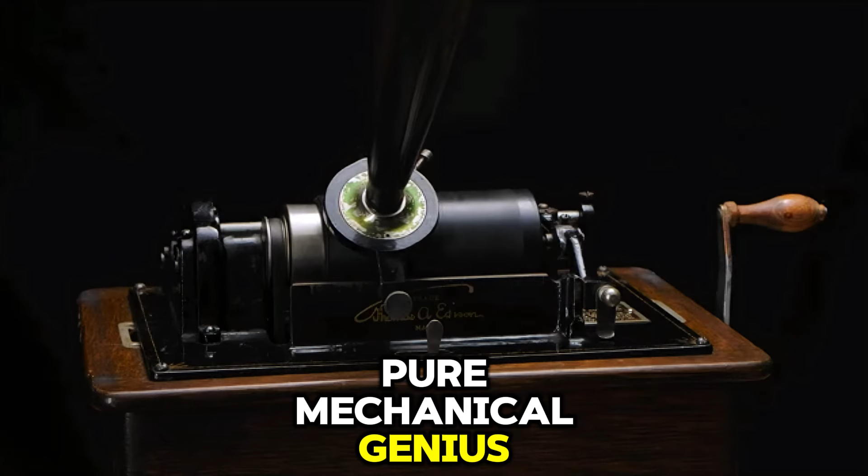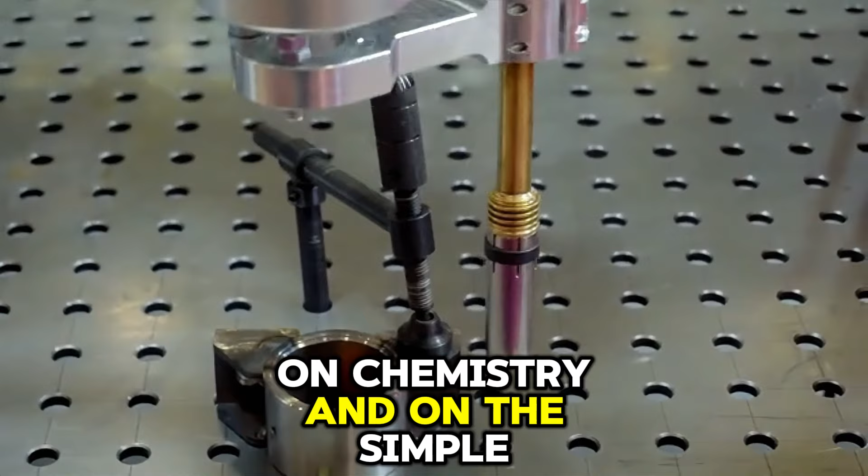While we rightly remember the thunder of tanks and the roar of fighter planes, many of the most critical battlefield tools were forgotten marvels of engineering. These were gadgets and systems that needed no plug, no battery, and no fragile electronics. They ran on springs, on pressure, on chemistry, and on the simple, elegant laws of physics. They were the unsung heroes of a world at war, proving that real power doesn't always come from a socket. Today, we're uncovering 12 forgotten technologies that prove you don't need a plug to be powerful.

Number 1, before radar, listening to the skies. Along the British coastlines, before radar existed, before electronic systems transformed warfare, something remarkable emerged. They built acoustic mirrors, large concrete structures, sometimes 45 meters in diameter, designed to listen to the sky. Parabolic reflectors focused sound waves from aircraft engines onto microphones placed at their focal point. No electricity, no active components, just the physics of sound reflection. The same principle you encounter in a museum's whispering gallery.

Locals still call the ones at Dungeness in Kent and Hythe the listening ears. Microphones placed at the focus of these mirrors could detect aircraft sound at distances far greater than what any observer could see from the English Channel, and operators would listen through earpieces or stethoscopes as sound waves concentrated naturally through the mirror's geometry. Here's where it gets complicated.

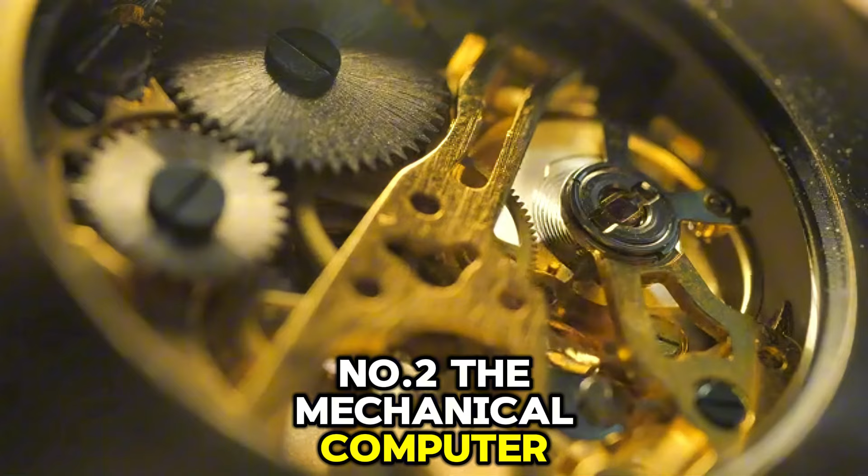Number 2, the mechanical computer that aimed artillery. Now something genuinely changed naval warfare. The Mark I fire control computer, developed by Hannibal C. Ford and William Newell. Weighing over 3,000 pounds, it sat deep inside warship hulls in a watertight compartment called the plotting room, and it was an electromechanical analog computer where the calculating mechanism itself was purely mechanical.

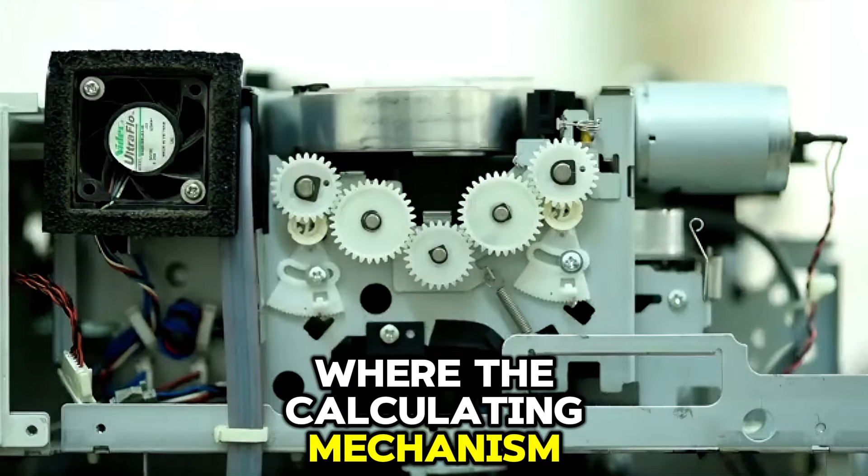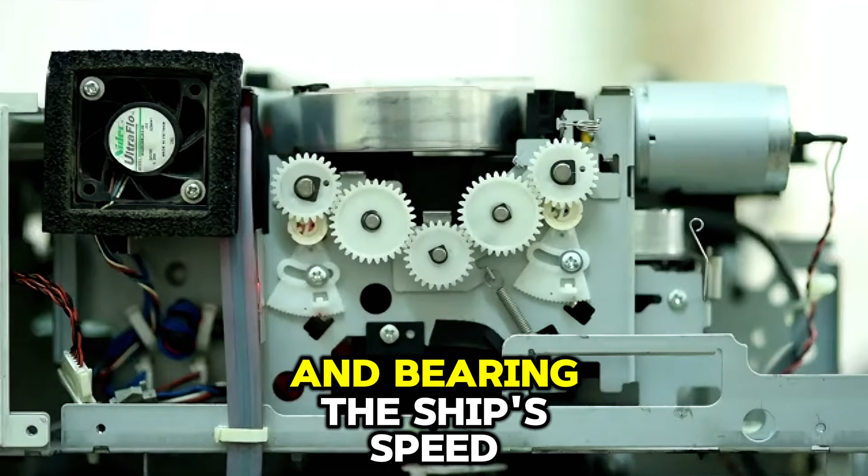A team of sailors stood around this 4-foot-tall machine, feeding it information: the target's range and bearing, the ship's speed through water, wind speed and direction, even the average muzzle velocity of the guns, based on propellant temperature and the number of rounds already fired that day. The Mark I then performed continuous mathematical calculations using 4 component integrators, devices that worked like ball-type computer mice rotating a ball to solve geometric equations.

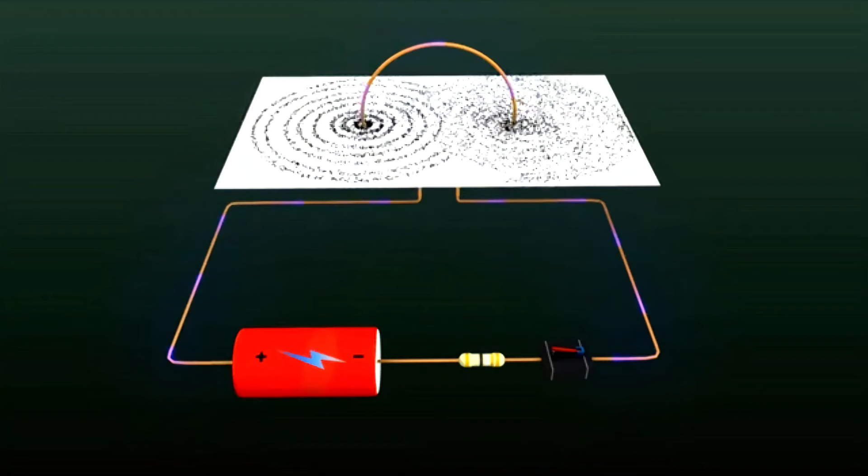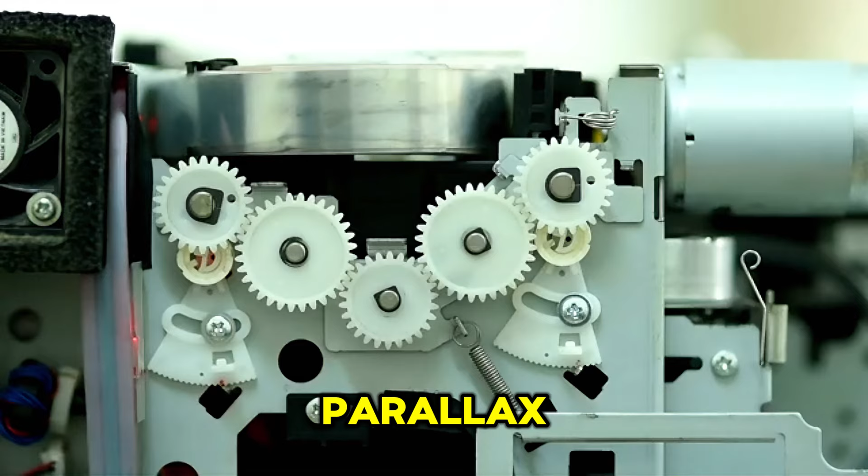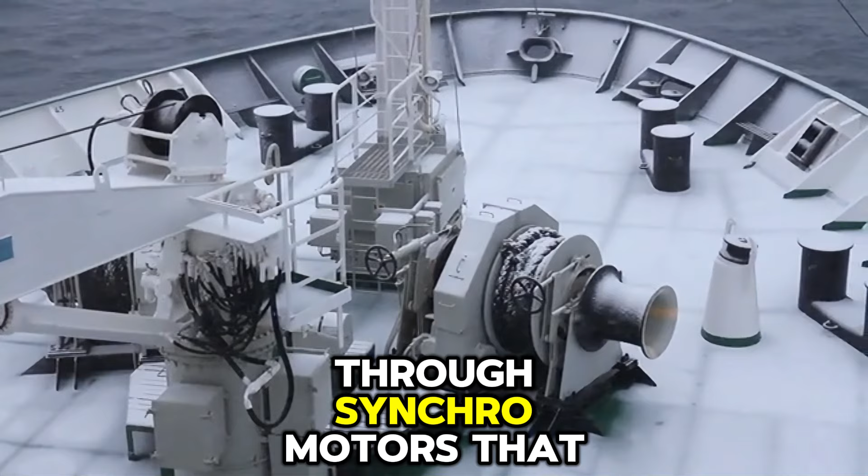The computer automatically calculated lead angles to the future target position, adding corrections for gravity, relative wind, the spinning motion of the projectile, and something called parallax, because the guns were displaced along the ship's length. All of this happened mechanically through gears and rotating discs and cam mechanisms that physically performed the mathematics. Output went to the gun mounts through synchro motors that actuated hydraulic servos to aim the guns with remarkable precision.

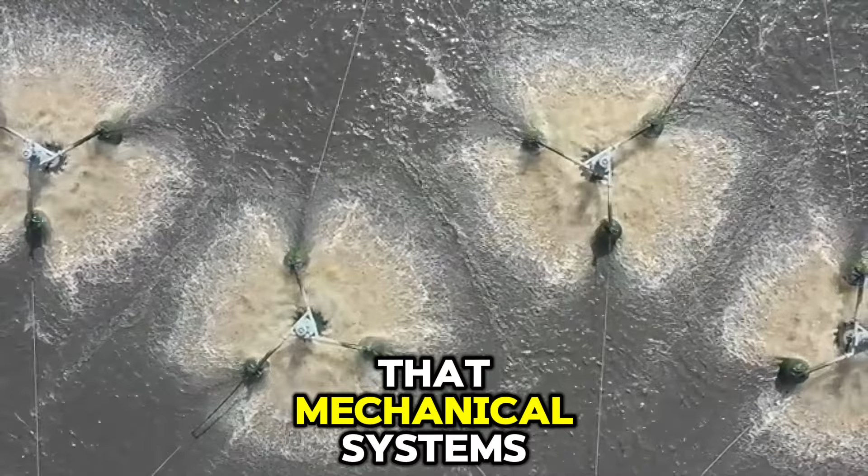Ship-to-ship and ship-to-shore gunfire accuracy improved significantly, but the Mark I proved most valuable in anti-aircraft warfare until jet aircraft arrived and pushed speeds so high that mechanical systems couldn't react fast enough.

Think about this for a moment. A 3,000-pound mechanical computer requiring no central processing unit, no digital logic, no transistors. It calculated firing solutions faster than humans could calculate them manually, and it kept doing it reliably for decades. Battleships equipped with the Mark I had up to 4 of these computers working simultaneously. Destroyers had one, and this system remained in service until 1991.

Number 3, the most expensive bomb sight in history. Carl Norden was a Dutch-Swiss engineer who immigrated to America in 1904 and started working on bomb sights in the 1920s, and the project nearly broke him. His early prototypes failed catastrophically. From only 3,000 feet altitude, his 1924 design showed a circular error probable of 110 feet, meaning half his bombs landed within that distance of the target, and that was worse than existing systems.

Bombardiers hated it because it was too complicated to use. Obsession drove Norden forward.

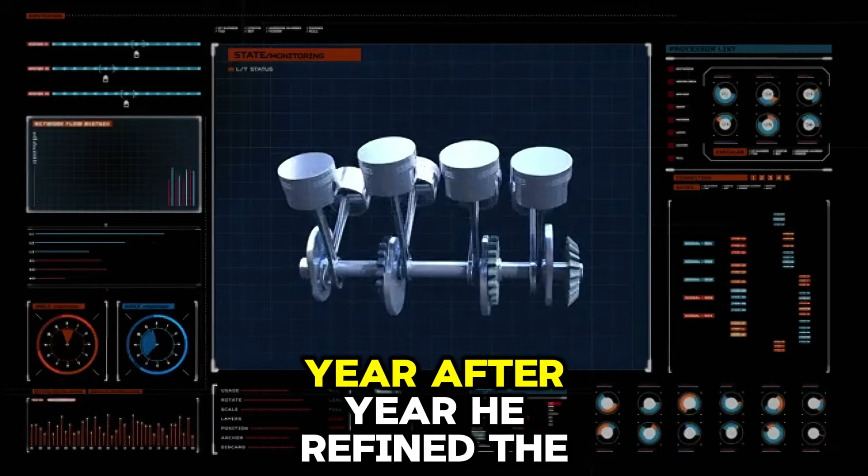Year after year, he refined the design, and by 1928 he'd improved the accuracy to 2% of altitude. By 1931, when the Mark 15 version arrived for testing, the accuracy had improved dramatically. From 4,000 feet altitude, it achieved an 11-meter circular error probable, and even at higher altitudes, it delivered 23 meters.

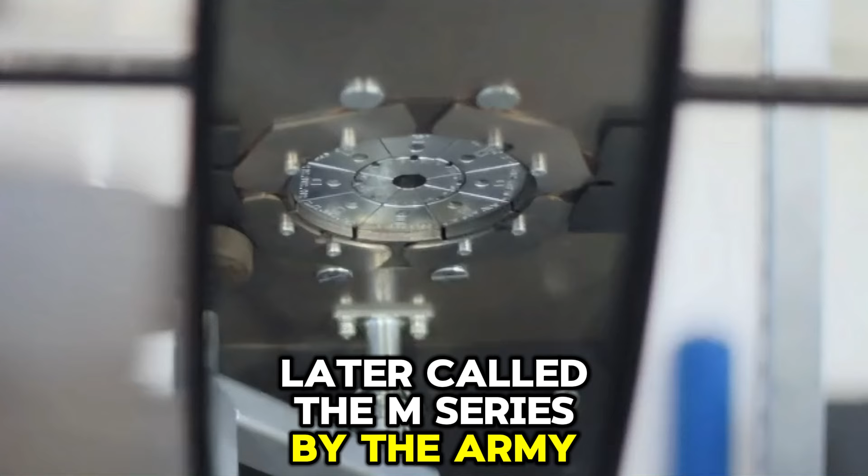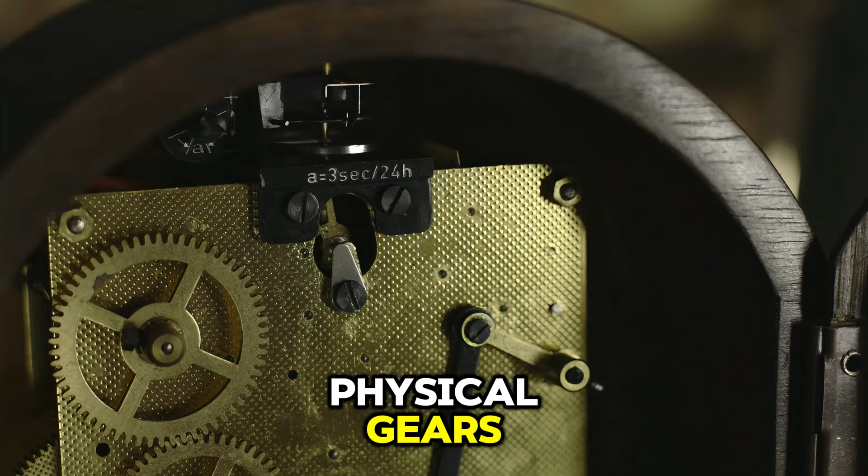The Mark 15, later called the M series by the Army Air Force, combined a mechanical analog computer with optical sighting equipment and a gyroscopic stabilization platform. The bombardier would locate the target in the sighting telescope, then make fine adjustments using 2 control wheels throughout the bomb run. Inside the bomb sight, a wheel and disc calculator continuously recalculated the bomb's impact point based on changing flight conditions. All mechanical, all based on physical gears, cams, and rotating discs, performing mathematics.

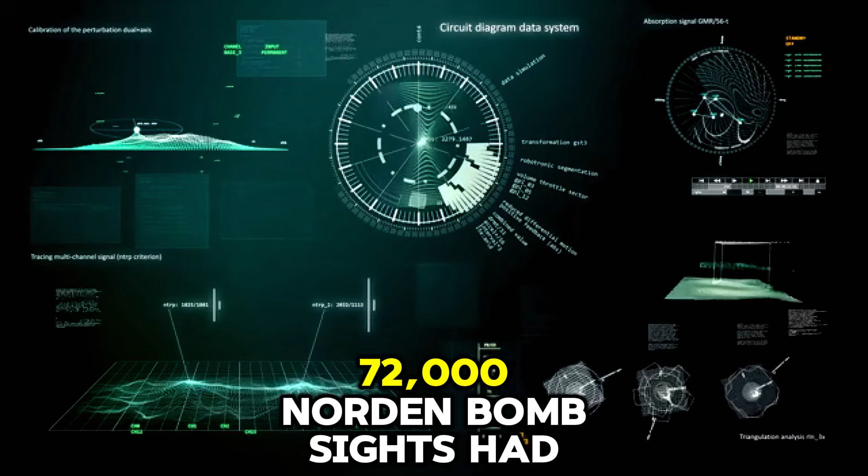What nobody expected was the cost. The total development and production budget reached $1.1 billion. That's 2/3 of the Manhattan Project's budget. By war's end, 72,000 Norden bomb sights had been produced at $8,800 each.

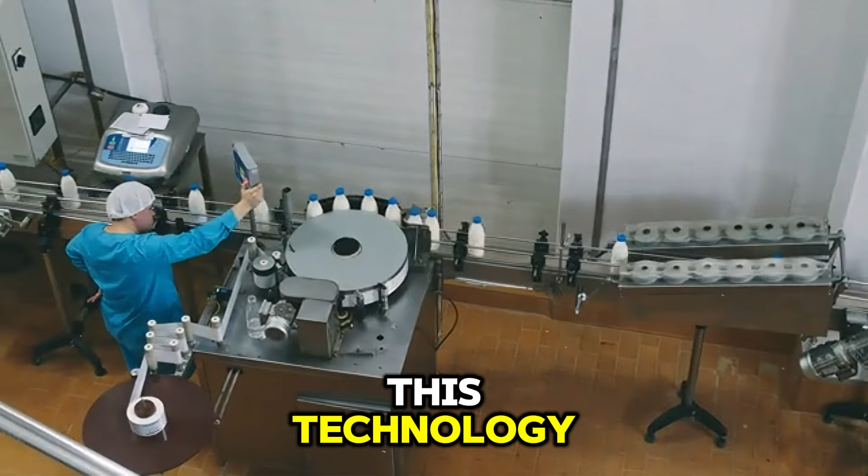And here's the irony that makes this technology so interesting: in actual combat, the Norden did not achieve its expected precision. The average circular error probable in 1943 was 1,200 feet, significantly worse than pre-war testing suggested. The difference between laboratory conditions and actual combat, between stable platforms and turbulent air, between theory and reality, turned out to be enormous.

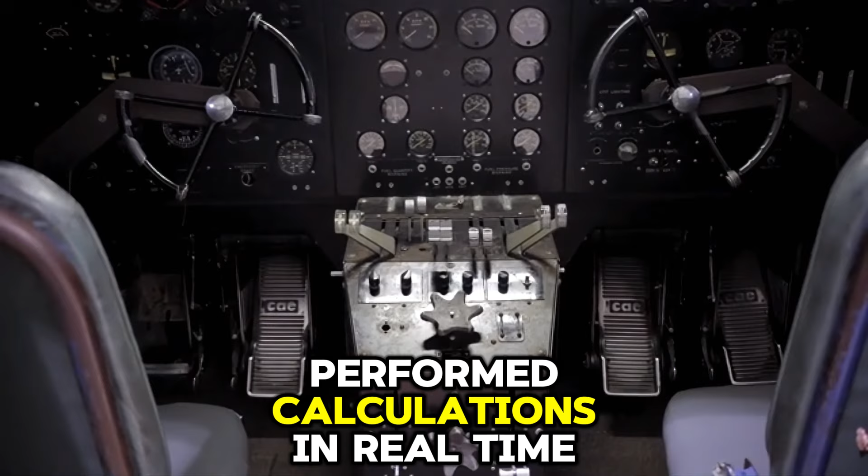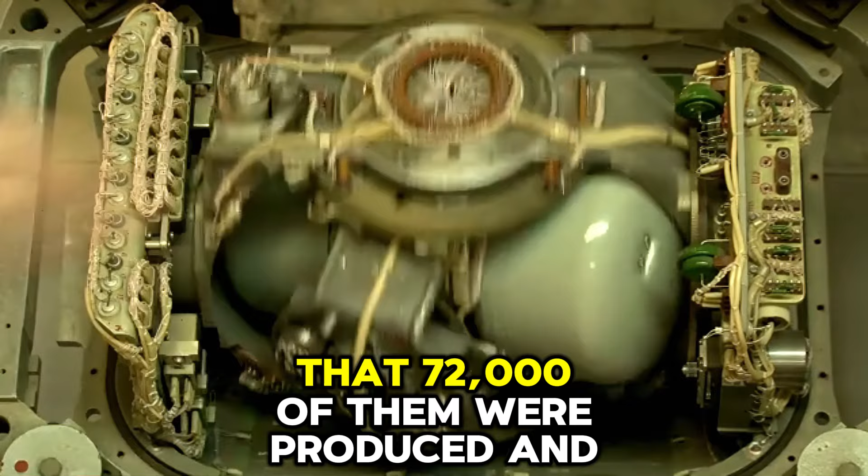But the reputation endured, and that matters, because the mechanical computer inside that bomb sight performed calculations in real time, continuously, without any electronic components. It did this so effectively that 72,000 of them were produced and deployed. That's the scale of mechanical engineering achievement.

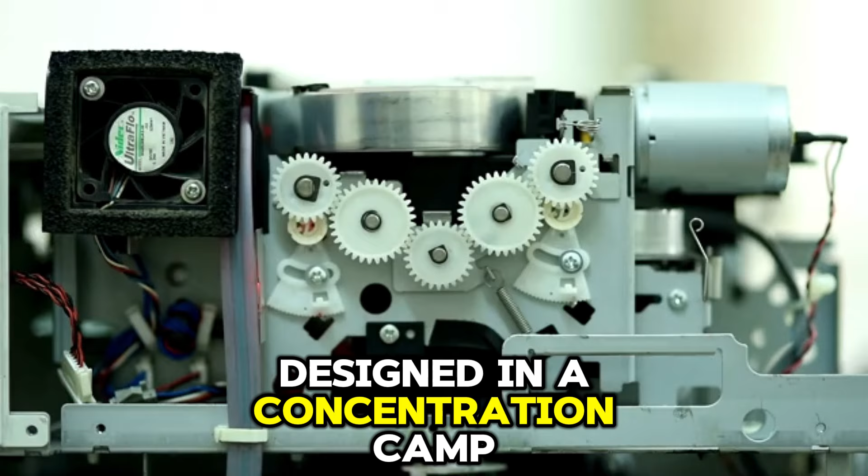Number 4, the hand-cranked calculator designed in a concentration camp. Curt Herzstark was an Austrian engineer who managed his family's precision instruments company in Vienna, and when Nazi Germany annexed Austria, he fell under the Nuremberg laws, classified as a Mischling, or mixed blood person, because he had a Jewish father and an Austrian mother - a precarious legal status, a dangerous existence.

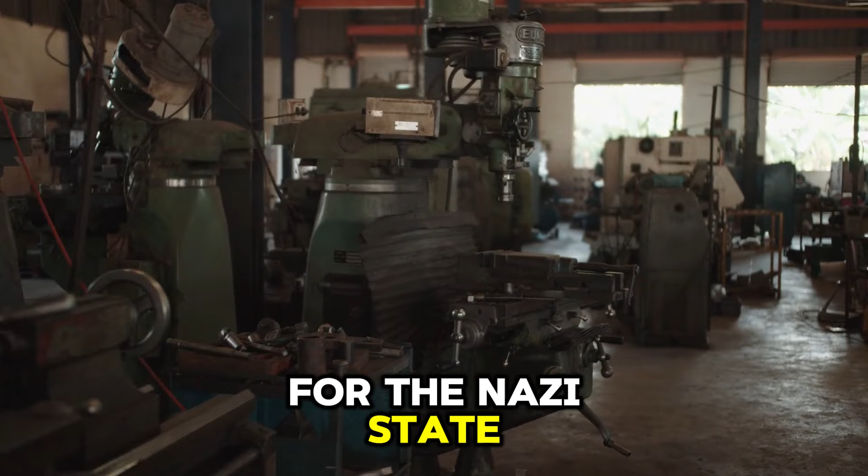The Nazis imprisoned him and sent him to Buchenwald concentration camp. While imprisoned, he was assigned to war equipment production for the Nazi state, and during that imprisonment, in that camp, he refined a hand-cranked mechanical calculator he had begun designing before the war.

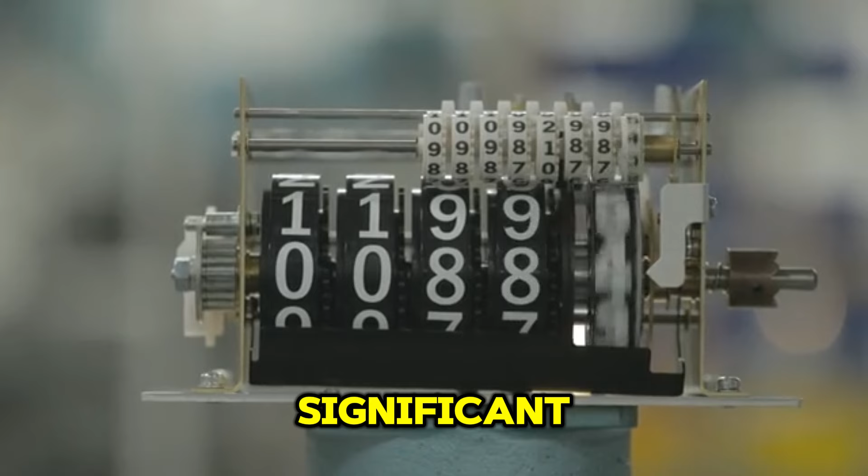The Curta was a cylinder about 4 inches tall, entirely mechanical, containing no electrical components whatsoever. You cranked it, used mechanical digit wheels and sliders to input numbers, and it performed addition, subtraction, multiplication, and division through pure mechanical motion. The innovation was significant because it used a modified stepped drum mechanism, a mechanical system elegant in its simplicity and effectiveness.

Curt Herzstark survived the camp. After the war, the Curta entered production, and for 2 decades it remained the best portable calculator available until electronic calculators displaced it in the 1970s.

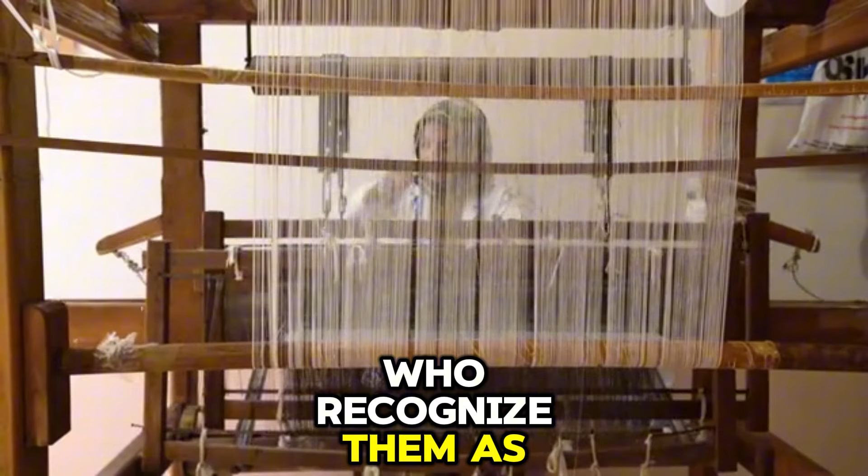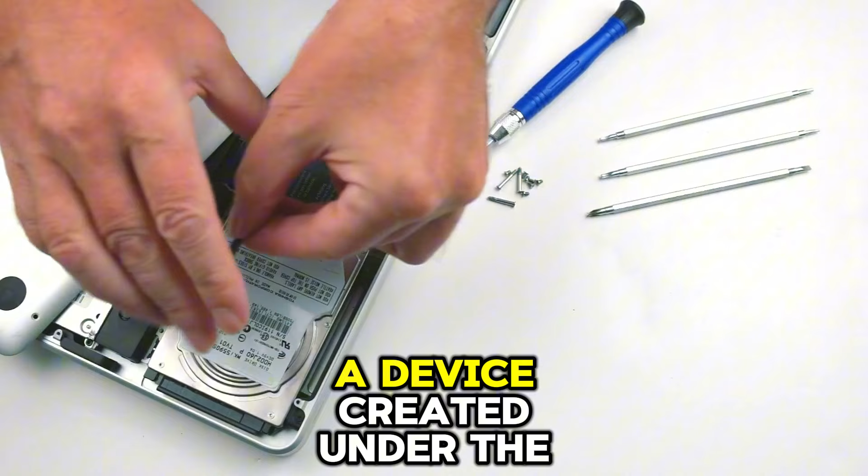Here's what's remarkable: thousands of original Curtas remain in working order today, and they're highly sought by collectors who recognize them as performing calculations just as smoothly now as they did 70 years ago. The story of the Curta is the story of human ingenuity persisting even in circumstances of extreme duress - a mechanical calculator designed in a concentration camp, a device created under the worst imaginable conditions that outlasted most of the electrical technologies developed in comfort.

Number 5, submarine periscopes: simple optics, profound impact. When you think of submarine periscopes, you probably imagine them as high-tech instruments, but they're not. Submarine periscopes are optical engineering achievements built from centuries-old principles and requiring no electricity whatsoever.

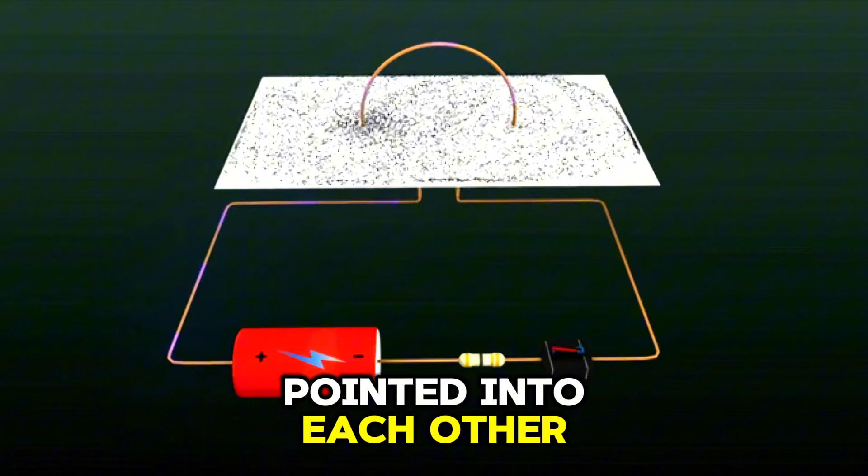Fundamentally, a periscope is 2 telescopes pointed into each other. Light enters the objective lens at the top, travels down a tube, gets reflected 90 degrees by a prism, travels horizontally, gets reflected another 90 degrees by a second prism, and finally reaches the eyepiece, where the observer looks.

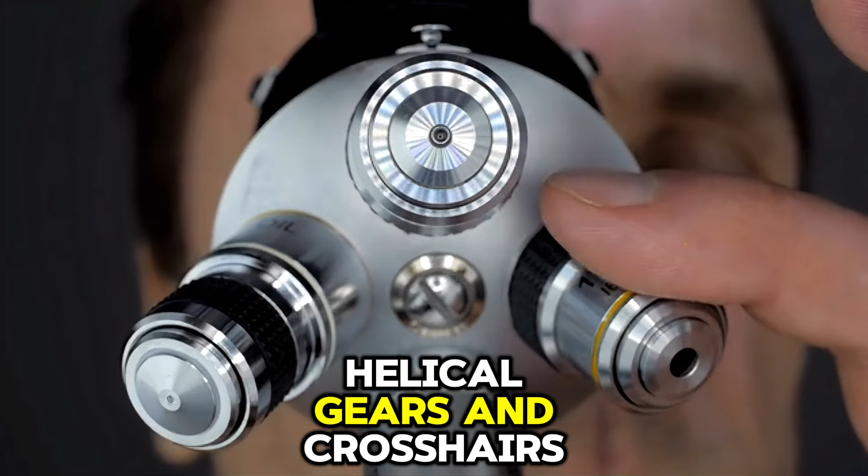Magnification depends on the relationship between the objective and eyepiece telescopes. Focus adjusts manually through helical gears, and crosshairs provide mechanical aiming marks. That's it, that's the entire technology: lenses, mirrors, prisms, and mechanical gears with no electricity required.

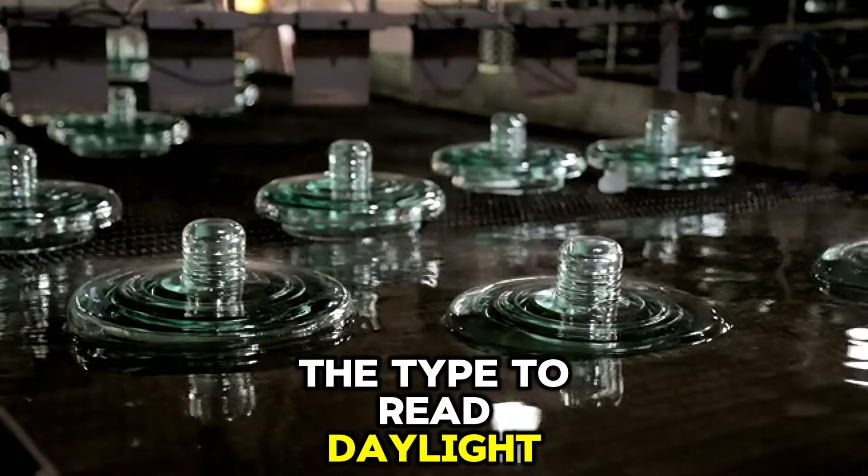The Type 2 daylight attack periscope was introduced into American submarine fleets in 1942 and found widespread use and acceptance throughout the remainder of World War II and for decades afterward. Search periscopes and night periscopes had larger heads to gather more light in reduced visibility conditions, while attack periscopes were slimmer, about 1¼ inches in diameter, to minimize visibility.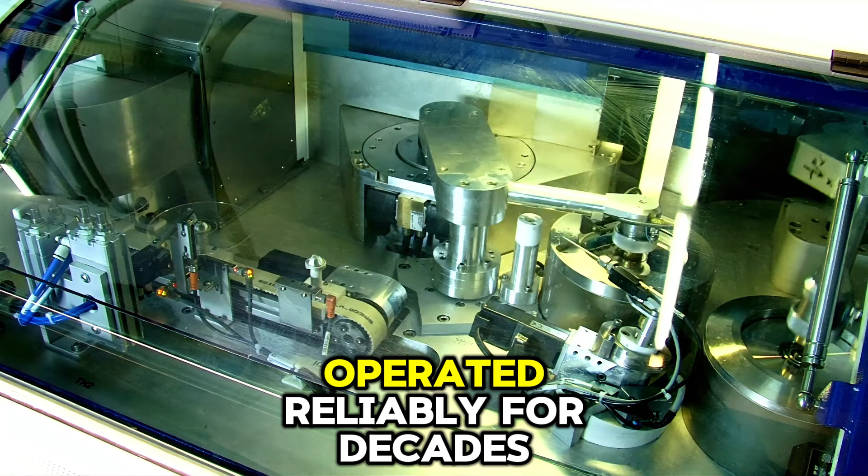The elegance of the mechanical periscope lies in its simplicity, because it required no active power, could be manufactured with pre-war precision machinery, operated reliably for decades, and gave submarine crews the ability to observe surface targets while maintaining submerged protection. That's a profound operational advantage derived from basic optics and mechanical precision.

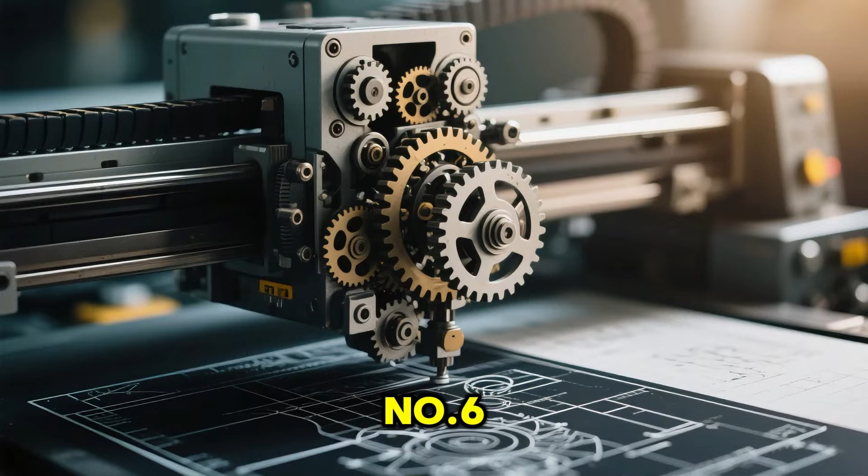Number 6, firing solutions at sea: mechanical plotting.

On warships, officers needed to calculate firing solutions for their guns, which required precise positioning of the target, understanding the ship's motion, calculating range and bearing, and predicting the target's future position.

These calculations happened on mechanical plotting tables, rotating brass arms with protractors, transparent perspex rulers, and geared mechanisms for precise rotation. Sailors would plot the target's position by marking bearing lines from observation posts, then rotating mechanical arms to their correct bearings. Where these mechanical arms intersected, that's where the target actually was, and the entire calculation got performed through mechanical geometry, through the physical arrangement of arms and the intersection of lines.

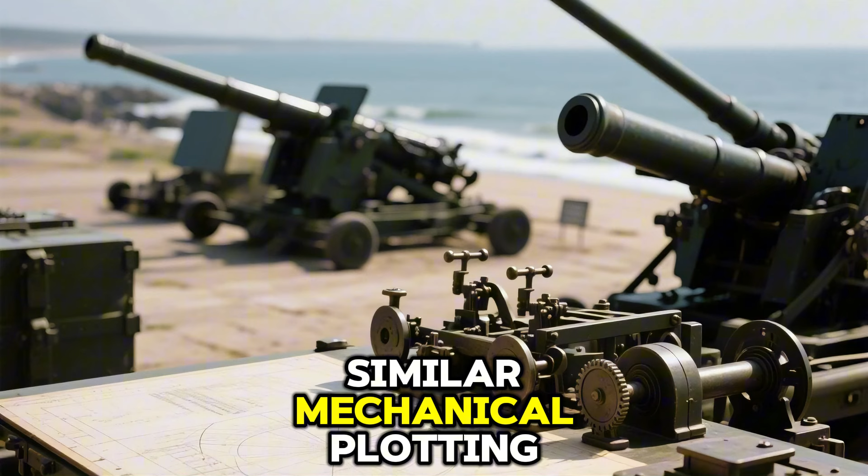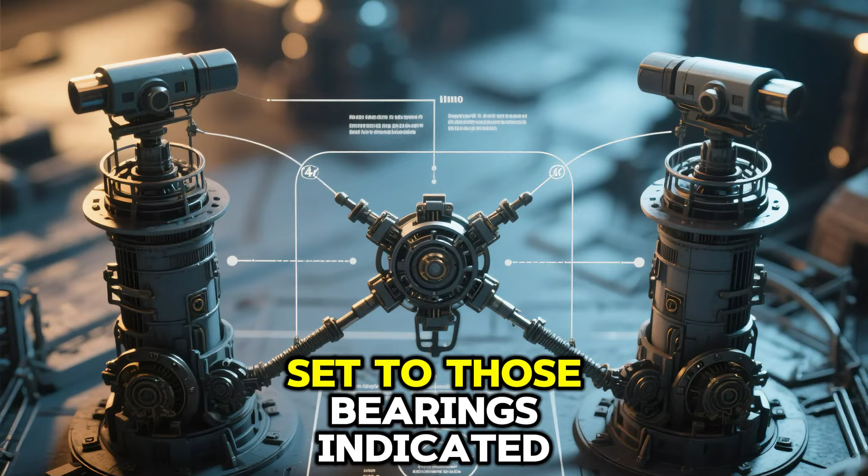For coastal artillery batteries, similar mechanical plotting systems determined firing solutions. Two fortress observation posts would transmit bearing information to a central mechanical device, and the intersection of mechanical arms set to those bearings indicated the target's location with remarkable precision. All of this got done mechanically, with no electrical components involved.

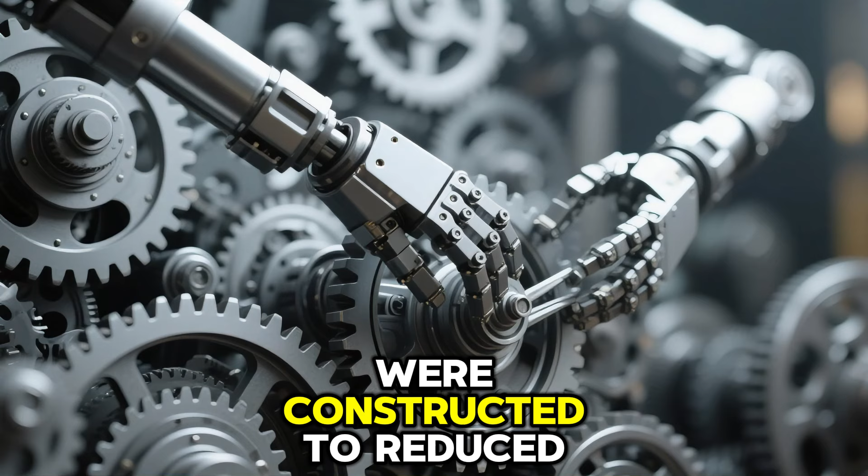These plotting instruments were constructed to reduced scale, a mechanical model of the actual geography with arms that could be positioned according to received bearing information. Through mechanical geometry, pure physical mathematics, the system calculated firing solutions. This technology is almost entirely forgotten today, but the principle remains sound because mechanical systems can solve complex mathematical problems through the precise arrangement of physical components.

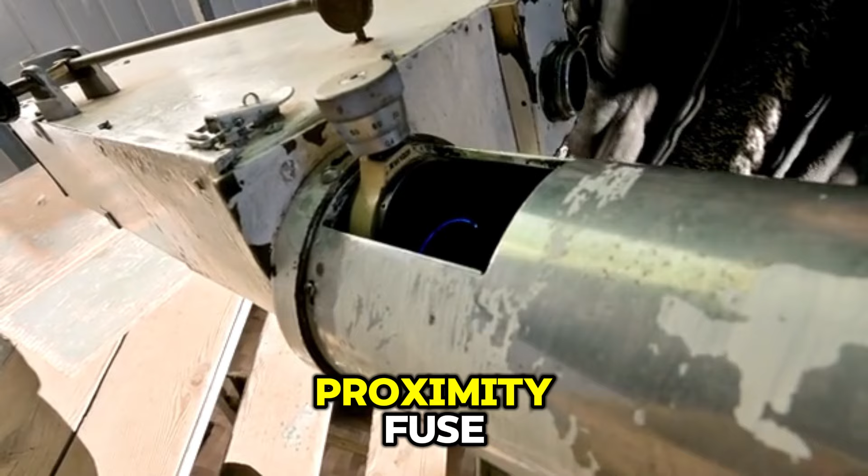Number 7: the detonator that changed everything. The proximity fuse. Before proximity fuses, artillery shells and bombs had only three detonation methods: direct contact, a timer set at launch, or an altimeter, and all of these had severe limitations.

A shell that barely missed its target would not explode. A timer fuse required accurate prediction by the gunner and precise timing by the fuse mechanism, and if either was wrong, the shell exploded harmlessly before or after passing the target. At the start of the Blitz in London, estimates suggested it took somewhere between 20,000 and 100,000 artillery rounds to shoot down a single aircraft. And that's how difficult the targeting problem actually was.

Proximity fuses changed everything by detonating when the shell approached within a certain distance of its target, eliminating the need for direct hits or perfect timing.

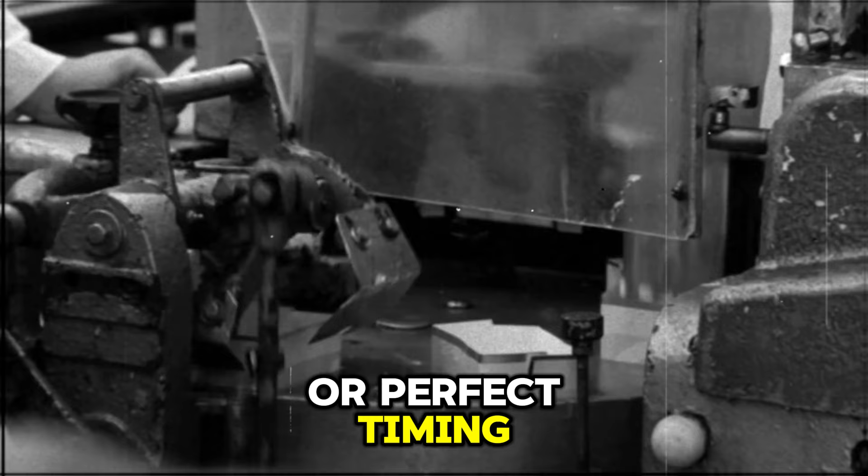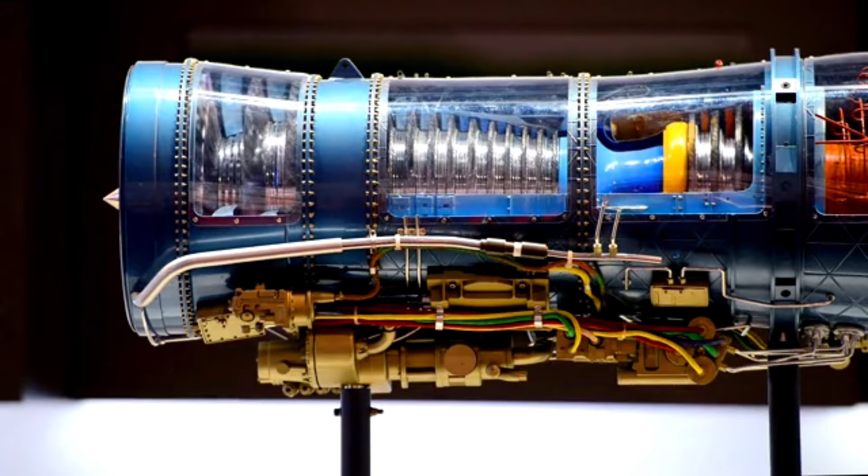The concept originated in Britain with Samuel Curran, William Butement, Edward Shire, and Amherst Thomson at the Telecommunications Research Establishment, proposing to use small-range Doppler radar within a fuse.

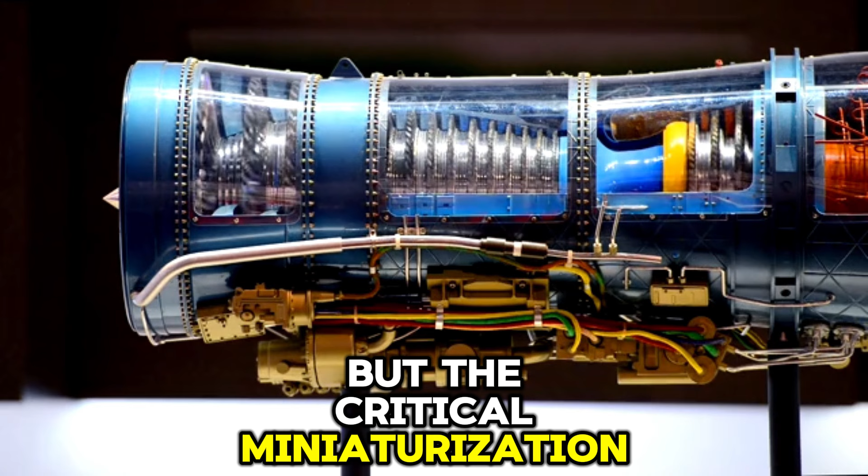But the critical miniaturization work, creating a fuse that could survive the extreme acceleration of being fired from a cannon and the immense centrifugal force of a spinning artillery shell, that work happened in America. Physicist Merle Tuve and his Section T team at Johns Hopkins Applied Physics Laboratory solved the engineering challenge.

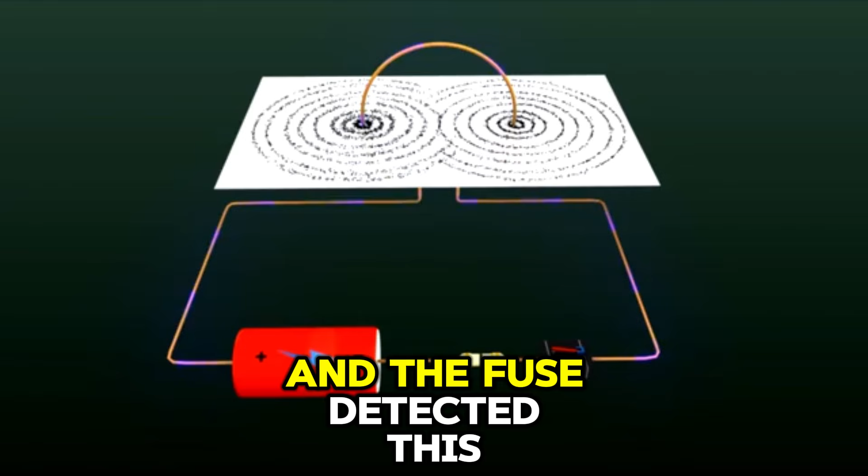The fuse contained 4 or 5 electron tubes, where one tube acted as a transmitter connected to the shell's antenna, continuously emitting radio waves around 180 to 220 megahertz. As the shell approached a target, the transmitted signal reflected back, and the fuse detected this reflected signal. The movement of the shell and target created a Doppler frequency shift, a change in frequency due to relative motion, and this frequency shift was the signal that triggered detonation.

To survive the extreme stresses of artillery launch, engineers packed components in wax and oil for stress equalization, replaced conventional electrodes with planar electrodes, and modified miniature hearing aid tubes to withstand up to 20,000 Gs of acceleration and centrifugal forces from shells spinning at 30,000 RPM.

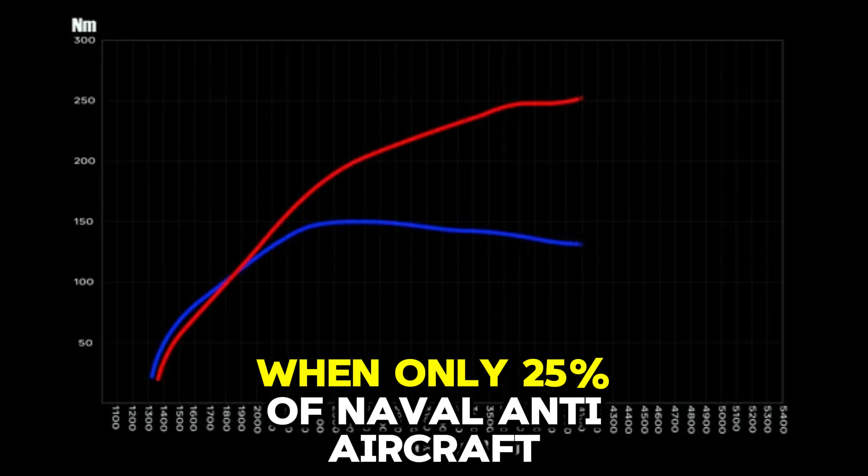The effectiveness was dramatic. In 1942, a test aboard the USS Cleveland destroyed 3 drone aircraft with just 4 projectiles. And by 1943, when only 25% of naval anti-aircraft ammunition used proximity fuses, those fuses accounted for 51% of the aircraft kills. Production scaled enormously over the war years.

Over 22 million proximity fuses were manufactured, and the cost dropped from $732 per fuse in 1942 to $18 in 1945, a 98% reduction through manufacturing efficiency. Over 100 American companies got mobilized for production, and by 1944, a large proportion of America's entire electronics industry was dedicated to making proximity fuses.

In the Battle of the Bulge, 200,000 shells with proximity fuses, codenamed POSIT, were deployed in December 1944, and General Dwight D. Eisenhower had personally demanded access to these fuses after initially being denied them.

General George S. Patton credited proximity fuses with saving Liege and stated that their use required a complete revision of land warfare tactics. German divisions, confident they were safe from timed artillery fire because bad weather would prevent accurate observation, got caught in the open by proximity-fused shells exploding just above the ground.

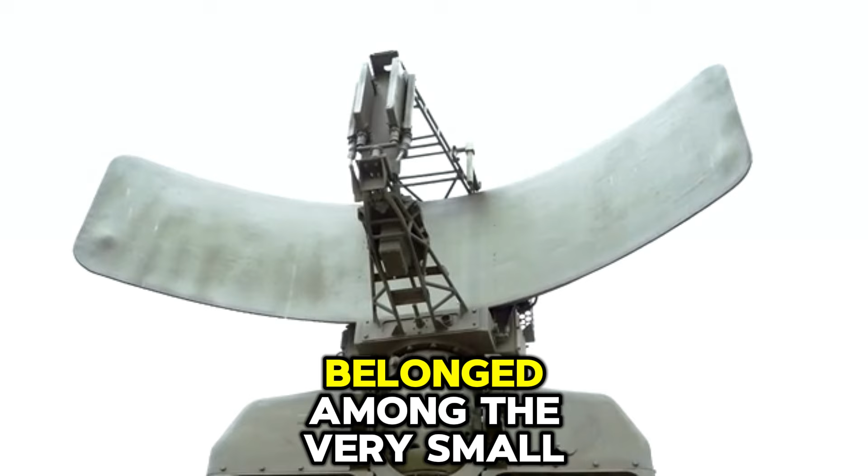Admiral Lewis Strauss summarized it this way: "One of the most original and effective military developments in World War II was the proximity fuse, and while no invention alone won the war, the proximity fuse belonged among the very small group of developments, such as radar, upon which victory very largely depended." The government classified it at levels comparable to the atomic bomb because security was so tight that Soviet spy Julius Rosenberg managed to steal a working model only by finding a non-anti-aircraft variant, while the most valuable type remained secure.

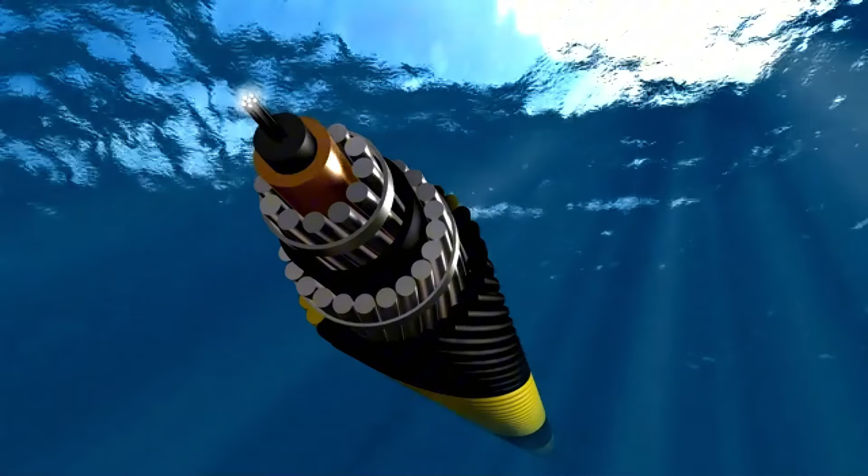Number 8: The torpedo that guided itself. Torpedo guidance systems represent one of the oldest mechanical technologies, refined to remarkable precision by World War II.

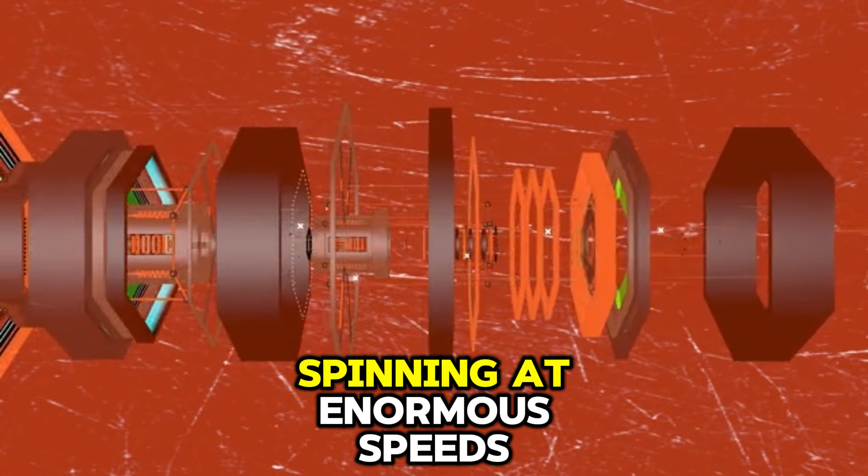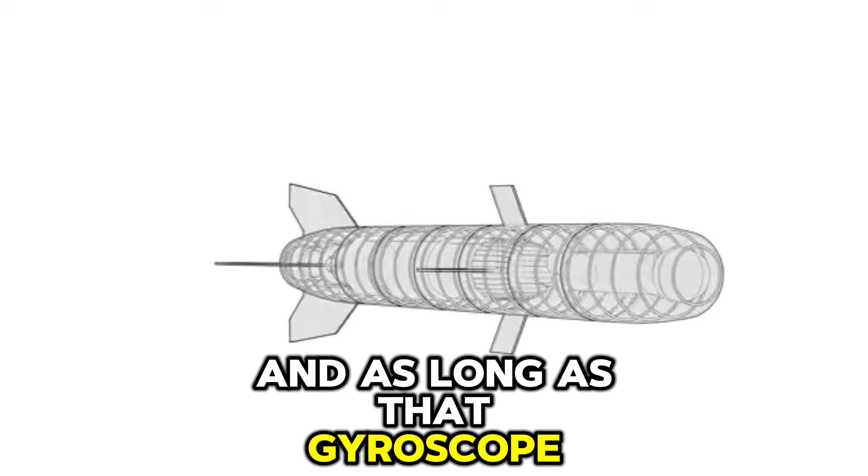Every torpedo guidance system relied on a gyroscope spinning at enormous speeds, often 15,000 to 20,000 RPM. This spinning mass possessed a remarkable physical property: resistance to changes in its rotational axis. A gyroscope wants to keep spinning in the same direction. This property got exploited brilliantly because the torpedo's gyroscope was aligned along the torpedo's body axis, and as long as it maintained its spin and orientation, it provided a mechanical reference point.

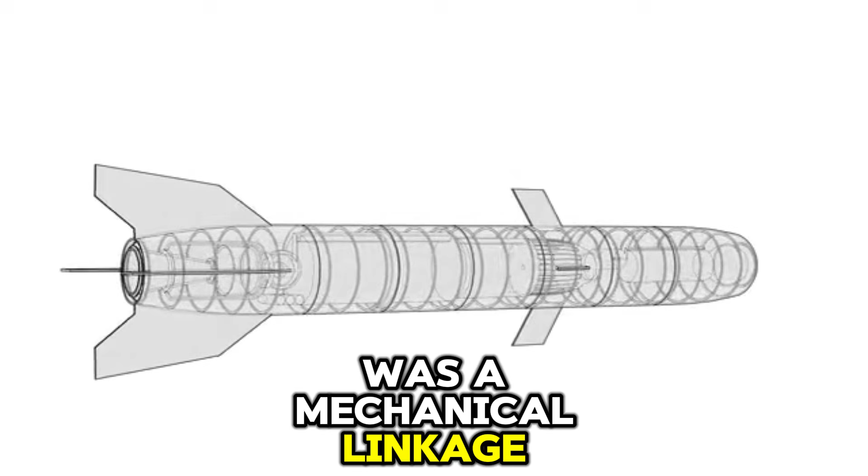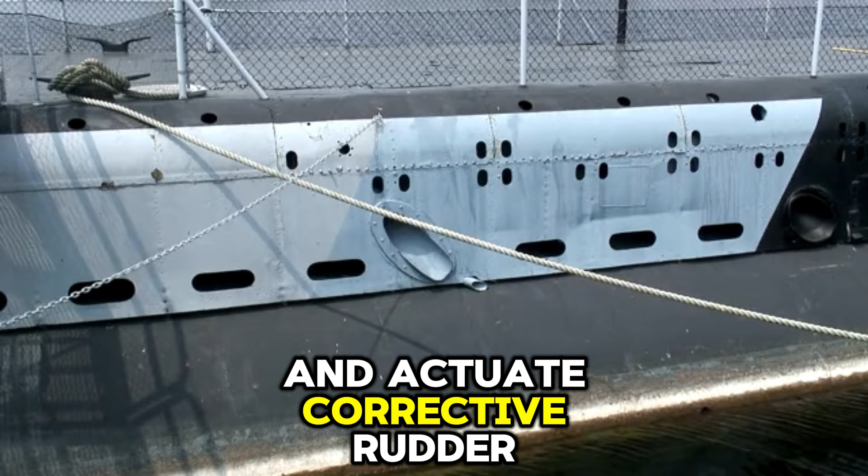Connected to this gyroscope was a mechanical linkage system, and if the torpedo began to deviate from its set course, this linkage would detect the deviation and actuate corrective rudder movements, all mechanically, without any electronic components.

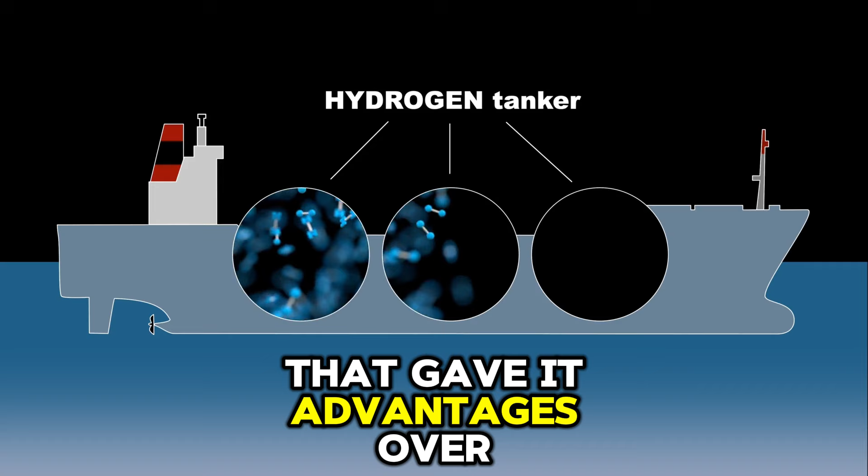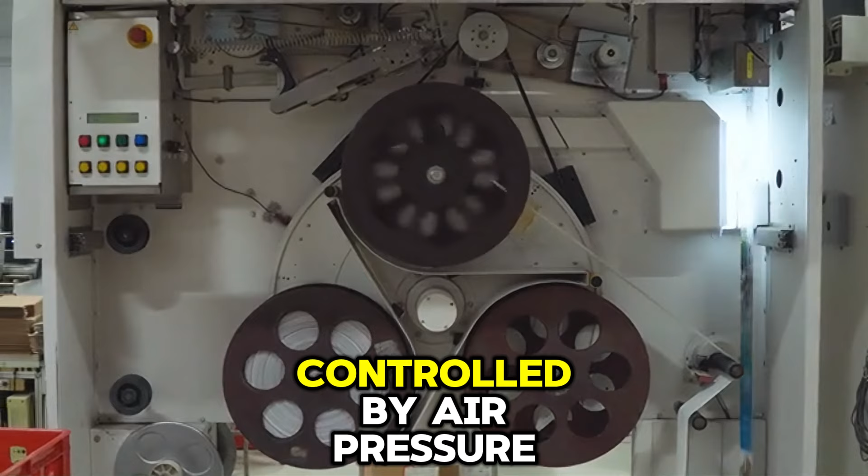The Japanese Type 93 Long Lance torpedo, considered by many to be the best torpedo of World War II, used oxygen and kerosene propulsion, a mechanical gyroscope for stability, and carried a large warhead that gave it advantages over contemporary alternatives. American submarine torpedoes used pressure-driven air systems to power the gyroscope spin-up mechanism, and mechanical spring mechanisms controlled by air pressure would unlock the gimbal structures, the rotating mounts, allowing angular correction.

Some torpedoes could be set to run in directions different from the tube axis, allowing what got called gyro-angled torpedoes, and the mechanical angle-setting capability could offset the initial course by up to 90 degrees. Separate mechanical mechanisms maintained the torpedo at a constant depth, keeping it from passing beneath the target ship.

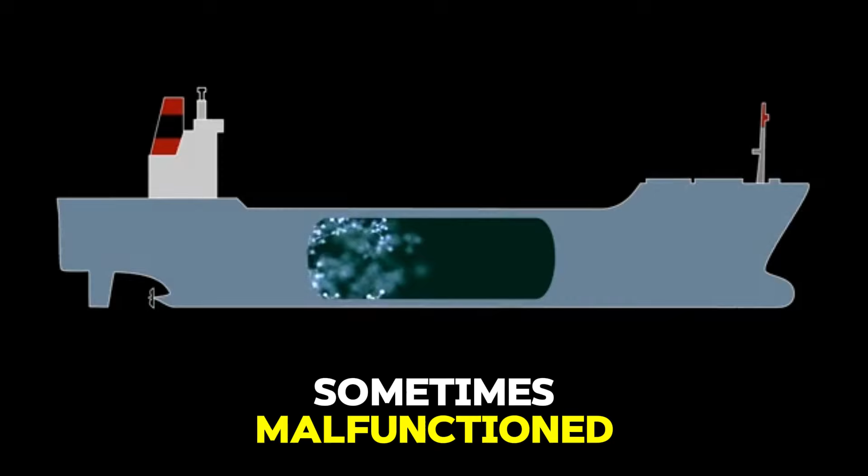The American Navy encountered significant problems with torpedo performance, not because the gyroscopic guidance failed, but because the depth-keeping mechanisms sometimes malfunctioned, causing torpedoes to run deeper than set and pass underneath their targets. Eventually corrected, these were design failures rather than fundamental flaws in mechanical gyroscopic guidance. The principle remains elegant because a spinning mechanical device, resistant to directional change, provides reference and control through pure physics—no electricity, no active components, just gyroscopic inertia and mechanical linkages.

Number 9: Cipher machines that typed secrets. During World War II, the U.S. Army used a portable mechanical cipher machine called the M209 for encoding and decoding secret military messages in the field.

The M209 operated on rotor principles, using a series of rotating mechanical disks to substitute letters in a predictable but changeable pattern, and it was compact enough to carry in the field. It required no electricity and was entirely hand-operated, with a crank mechanism and rotor adjustments performed manually.

The distinction matters because while the Enigma machine, famous for its role in German communications, appeared similarly mechanical, it actually required electrical power for operation, whereas the M209 was truly mechanical—its rotor substitution cipher performed entirely through manual operation and mechanical rotation.

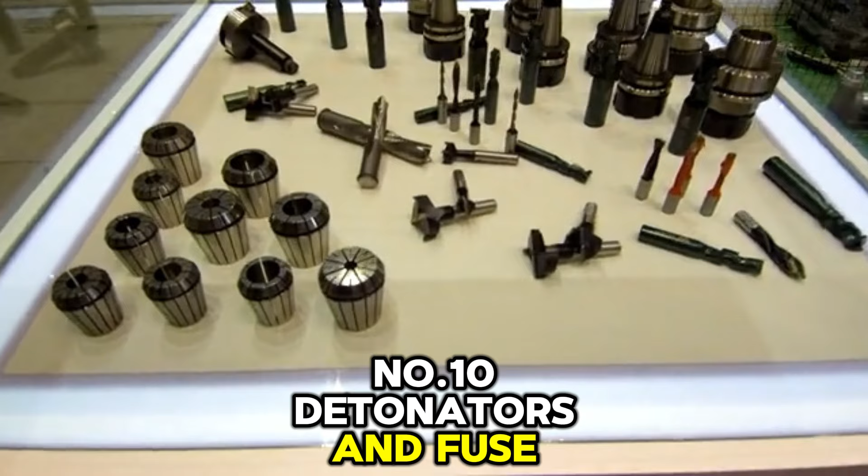Number 10: Detonators and fuses, the mechanics of explosion. Before proximity fuses revolutionized detonation, armies relied on mechanical fuses that operated through remarkably simple principles.

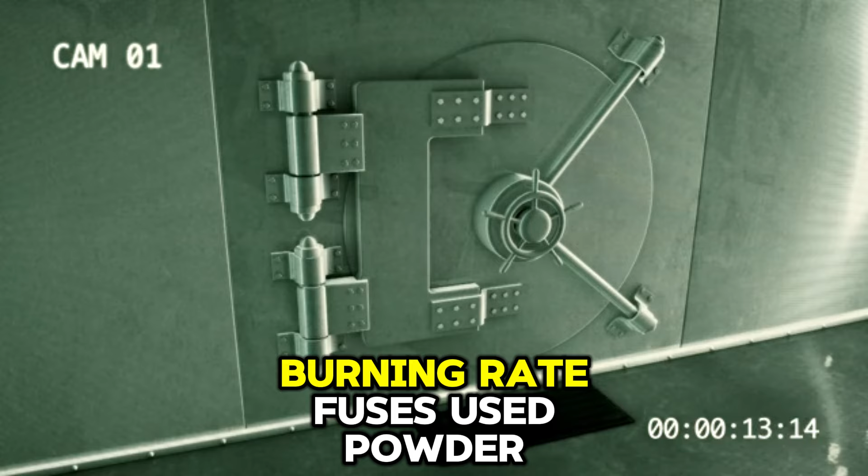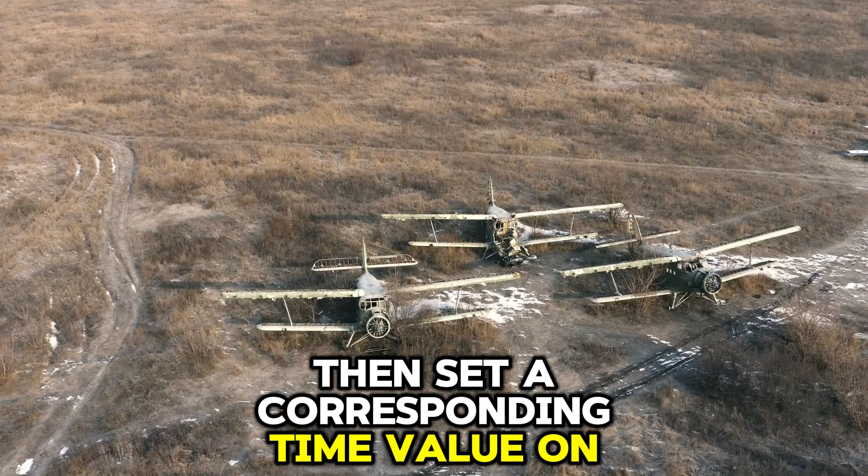Burning rate fuses used powder trains that burned at calculated rates to achieve predetermined detonation times, and artillery gunners would calculate the expected time of flight for their shell based on distance and firing angle, then set a corresponding time value on the fuse. The powder train, burning at a known rate, would reach the detonator at approximately the correct moment. The problem was that burning rates varied—manufacturing tolerance created unpredictability, and battlefield conditions like temperature, humidity, and altitude affected how powder burned, resulting in significant variation in actual detonation times.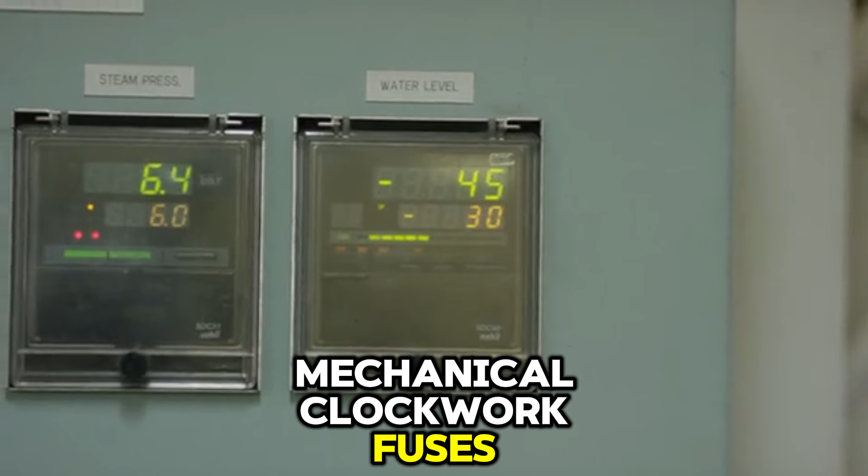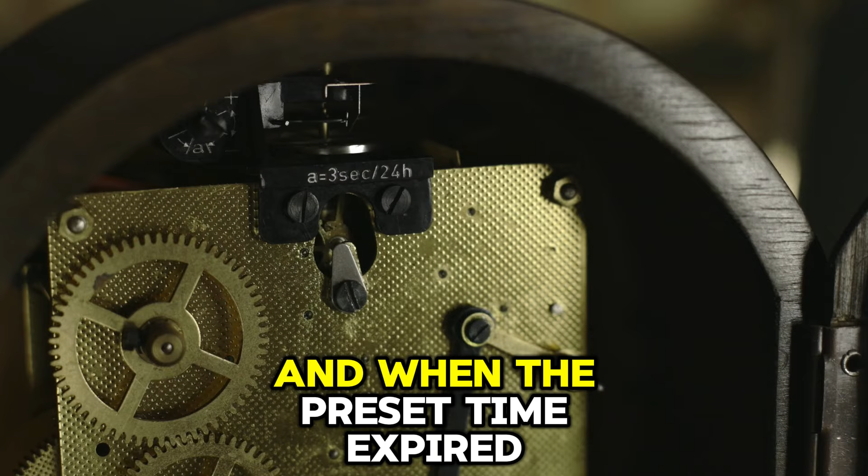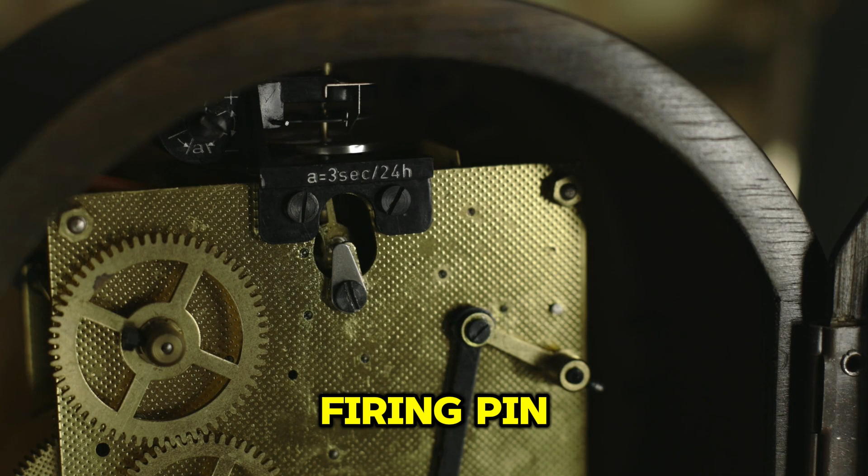Mechanical clockwork fuses represented a more controlled approach, where internal mechanisms wound like a clock would hold detonators mechanically, and when the preset time expired, the mechanical release would trigger the detonator. Contact fuses were even simpler: a spring-compressed firing pin, held back by a mechanical safety, would upon impact get overcome by compression, driving the firing pin forward into the detonator.

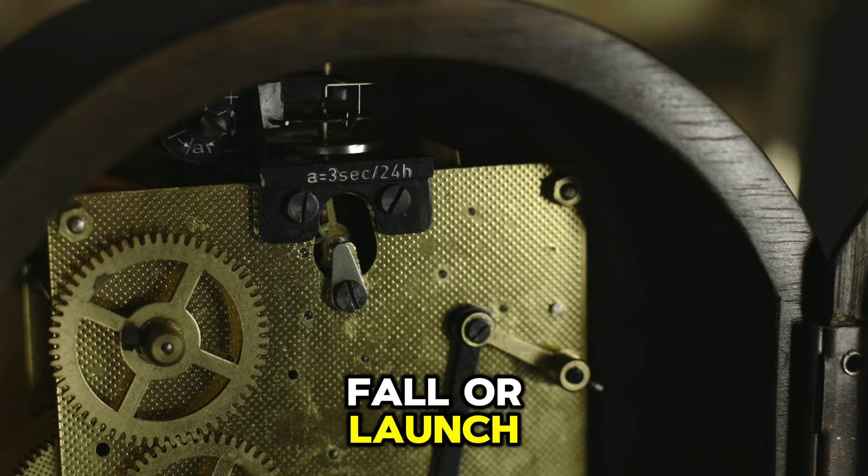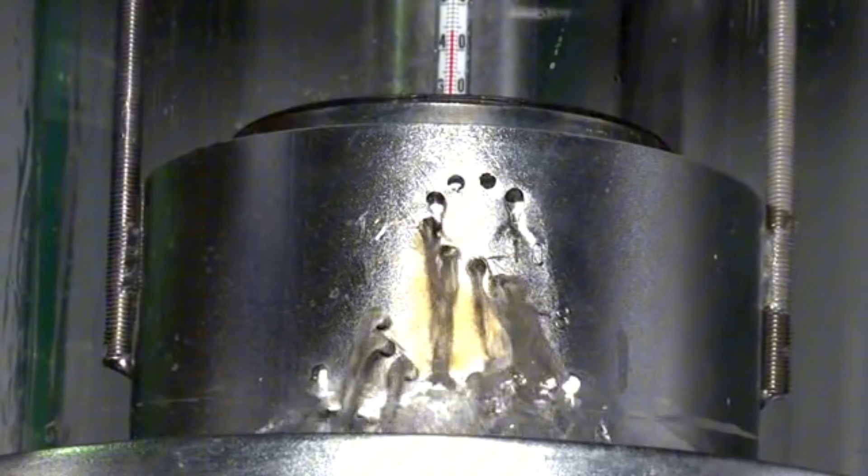Arming wires deployed during free fall or launch would release the safety mechanisms before the bomb or shell reached its target. These mechanical detonation systems represented the state of the art for decades because they were reliable, relatively simple to manufacture, and required no electrical components. The mechanics of explosion got controlled by purely mechanical means.

Number 11: Navigating without electronics.

Air navigators and ship navigators during World War II relied on mechanical instruments and manual calculation for their survival and success. RAF bomber navigators used maps, mechanical plotting rulers, compasses, chronometers, and sextants for celestial navigation, and dead reckoning, calculating position based on known heading and airspeed, required only mechanical instruments.

Navigators would mark their course on maps using mechanical rulers, calculate distance using dividers and compasses, and verify position using visible landmarks whenever possible. Ship navigators employed chart table plotters, mechanical instruments with rotating brass arms, and transparent rulers for plotting positions and calculating bearings.

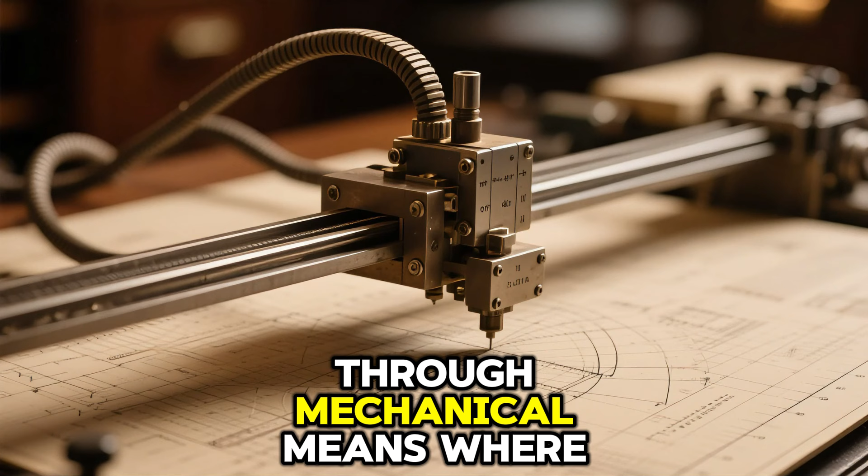These devices had no electrical components and functioned through mechanical geometry. Naval plotting tables enabled precise position calculation through mechanical means, where rotating arms got set to receive bearing information from observation posts, and the intersection of these mechanical arms indicated the target's location. Coastal defense batteries used similar mechanical plotting systems.

Aviation plotting instruments served similar purposes by providing mechanical tools for position calculation and course plotting, and the mathematics got performed through the arrangement of physical components, gears, rotating discs, and mechanical linkages that physically embodied the geometry of navigation.

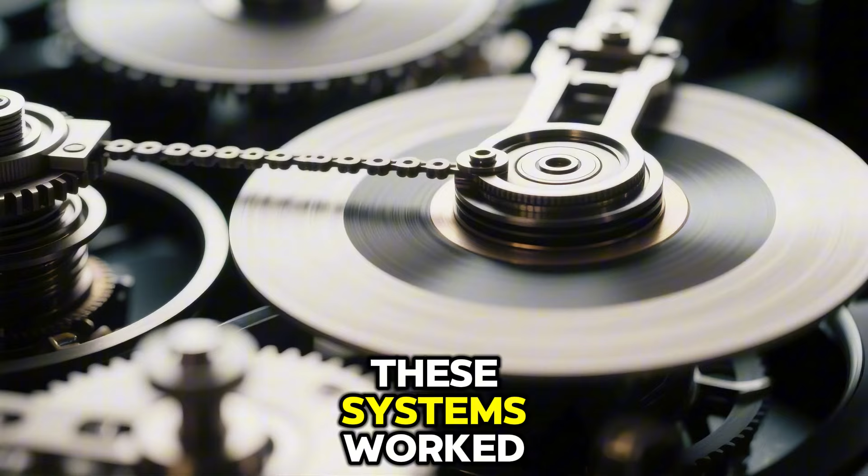These systems worked. Navigators planned bombing runs using mechanical instruments. Ships plotted courses. Artillery batteries calculated firing solutions. The mathematics of navigation got encoded in brass and perspex and rotating gears.

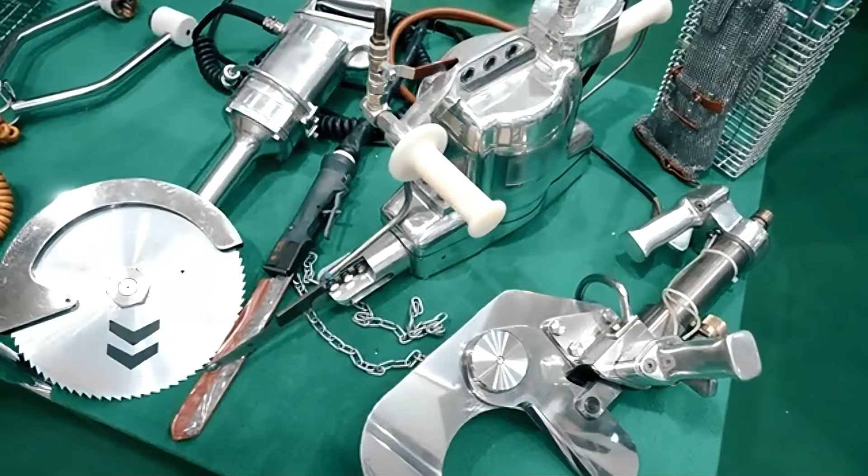Number 12: mechanical weapons and deception. The M2 backpack flamethrower operated through pressurized fuel delivery without electrical components. Pressurized fuel tanks arranged in a backpack configuration fed fuel through a hose to a nozzle assembly, and a manual valve controlled fuel flow through a trigger mechanism.

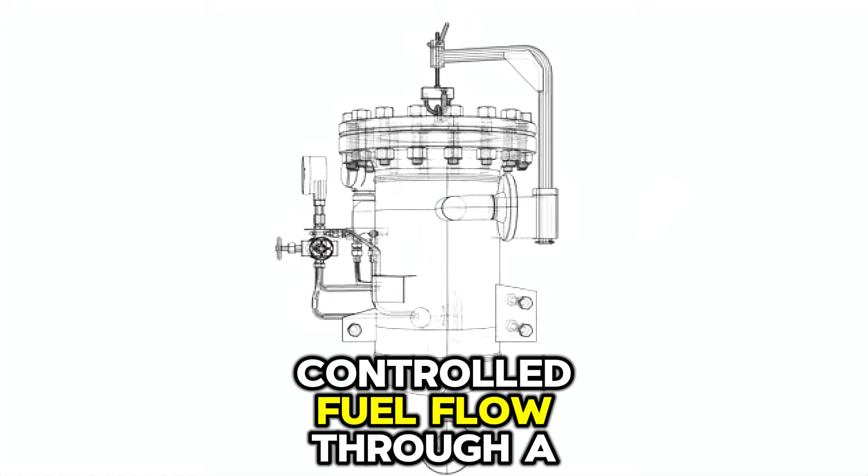At full force, the weapon expelled half a gallon of fuel per second with an effective range of 65 feet and approximately 7 seconds of burn time. The mechanical principle was straightforward: pressurized container, control valve, ignition.

Designed to be carried and operated by a single soldier, weighing 68 pounds fully loaded, it got deployed in both Pacific and European theaters during World War II, in Korea, and Vietnam.

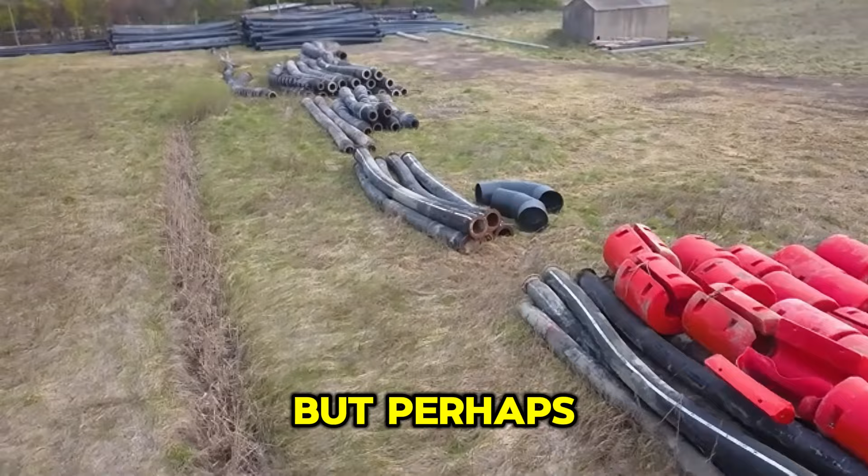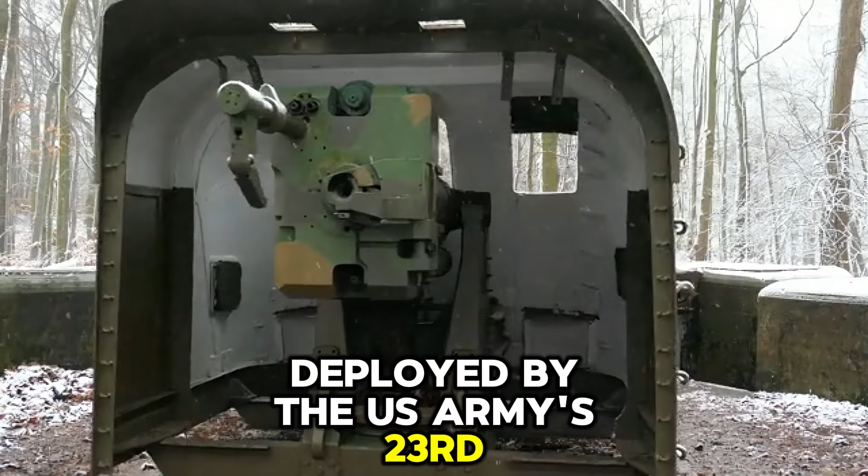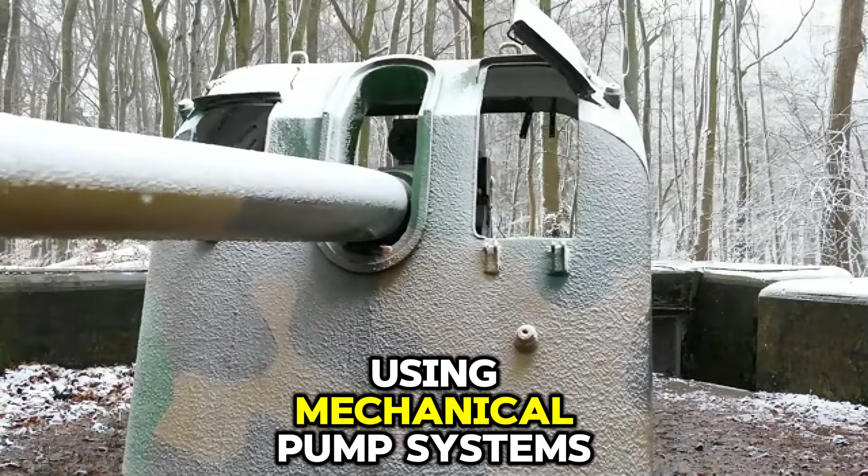But perhaps the most creative mechanical deception system was the Ghost Army, inflatable decoys deployed by the U.S. Army's 23rd Headquarters Special Troops. These were canvas-covered inflatable tanks, artillery pieces, and vehicles that collapsed flat for transport, then got inflated on site using mechanical pump systems with steel framework supports, maintaining shape and paint and camouflage patterns, providing optical deception.

Positioned to resemble authentic military units, these mechanical decoys repeatedly deceived German reconnaissance aircraft and forward observers. German intelligence would report sightings of fortified positions, artillery concentrations, and tank formations that were entirely inflatable. Enemy units would avoid positions that were nothing but rubber and canvas.

Dummy aircraft and airfields got constructed with painted runway markings. Fake factory installations got built to draw bombing attention away from real targets, and camouflage netting, supported by mechanical framework, concealed actual military positions. This was psychological warfare through mechanical means, deception engineered in rubber, canvas, and steel.

These 12 technologies represent something modern culture has largely forgotten: the possibility of sophisticated, effective military systems requiring no electrical power, acoustic mirrors that listen to the skies, mechanical computers that calculated artillery trajectories, mechanical gyroscopes that guided torpedoes, inflatable decoys that deceived the enemy.

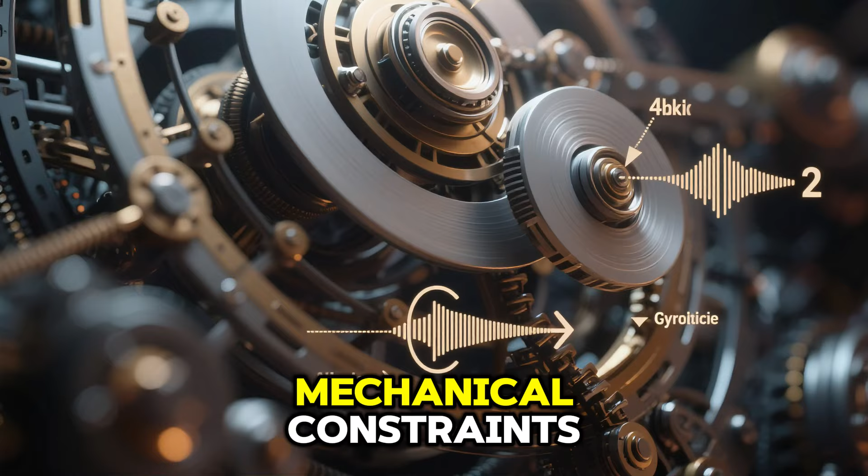Sometimes it's rotating discs and mechanical linkages. Sometimes it's the physics of sound reflection or gyroscopic inertia. Sometimes it's human ingenuity applied to mechanical constraints. That's the story of these 12 forgotten World War II technologies. They worked without electricity, and for a moment in history, they changed everything.